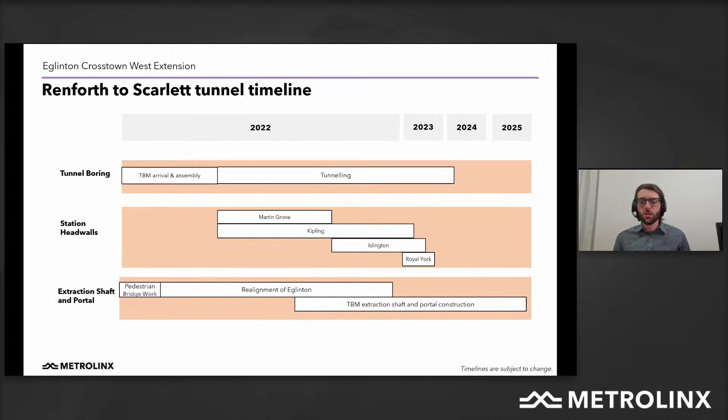Thank you very much, David, and good evening to everyone. In terms of the schedule of the Renforth to Scarlett Tunnel, I think we are really glad to share with the community that we are not only on time, but a few weeks ahead of schedule. The construction of the launch shaft is progressing well, basically finished.

The TBM arrived to site. We have already received the 2 TBMs, and we are progressing very well with assembly. The expected launch date of the TBM in spring 2022 is something we are confident we can maintain, and even gain some days on that.

There are no changes in terms of the station head walls. It is expected to start Martin Grove and Kipling head walls in April 2022, and we continue in the fall of 2022 with Islington, and in 2023 starting with the head walls of Royal York.

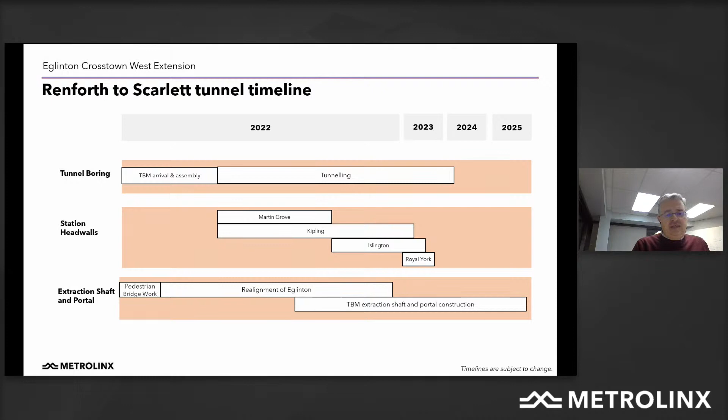The next thing we're going to open on this Renforth to Scarlett Tunnel site is the extraction shaft, which we will go through in the presentation with more detail, so I won't extend myself anymore on that.

In terms of the launch shaft update, I think we've brought some pictures of the progress, which are much better than an explanation. In this one you can see the progress of the launch shaft, which is almost finished.

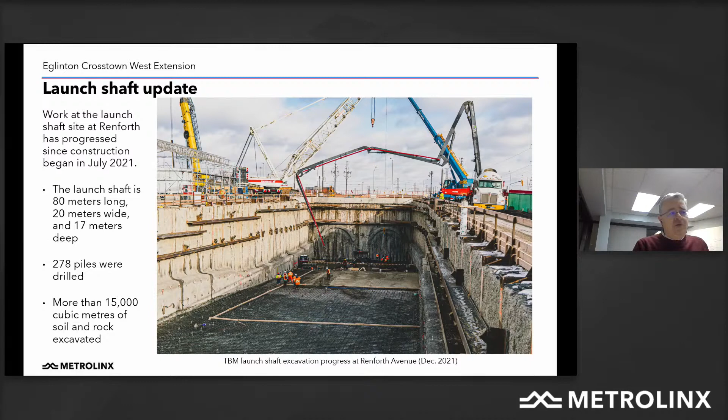This photo was taken in December and shows the start of pouring the concrete in the bottom slab. You can also see in the picture the big cranes we're using for the assembly of the TBM.

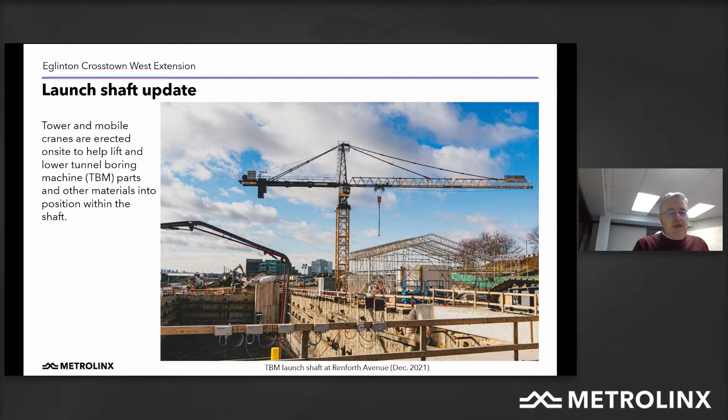As a big milestone in our project, on January 10th we lowered the first piece of the TBM into the bottom of the shaft. You can see in the picture that crane lowering the piece, and that the launch shaft is completely finished, with the bottom slab complete. This happened some weeks earlier than anticipated in our schedule, so we are really proud of the progress, even considering the winter conditions.

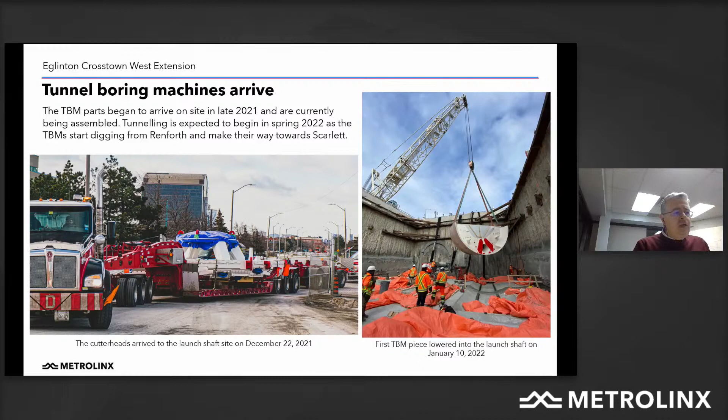The next site we are going to open is the TBM extraction shaft and portal. When the TBM finishes digging west of Scarlett Road, we will have to dismantle and remove it so we can continue construction of the portal. So we're going to use that shaft for two purposes: first, to extract the TBM that digs and constructs the tunnel from Renforth to Scarlett Road, and second, to permit the transition from underground to above ground.

The TBMs will operate up to 20 meters deep and will tunnel almost non-stop, with some scheduled maintenance days, until the tunnel is complete. Each TBM can tunnel 75 meters per week and will take approximately 20 months to complete the excavation and lining of the tunnel.

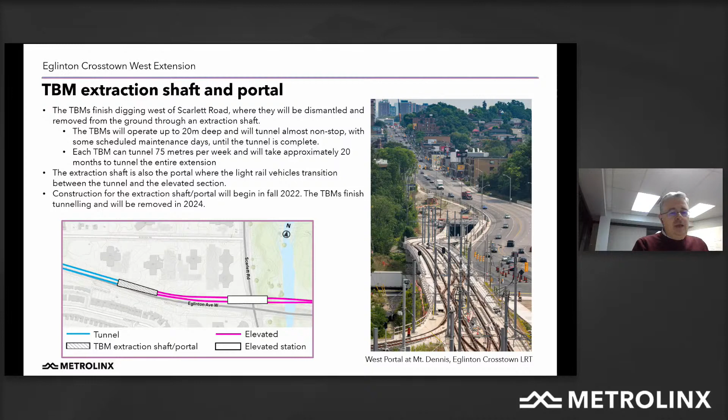Once we have constructed this ramp, we will divert traffic through the new ramp and demolish the existing one. It's important to note that during this phase the pedestrian bridge will remain open, not only through this stage but throughout the construction of the project.

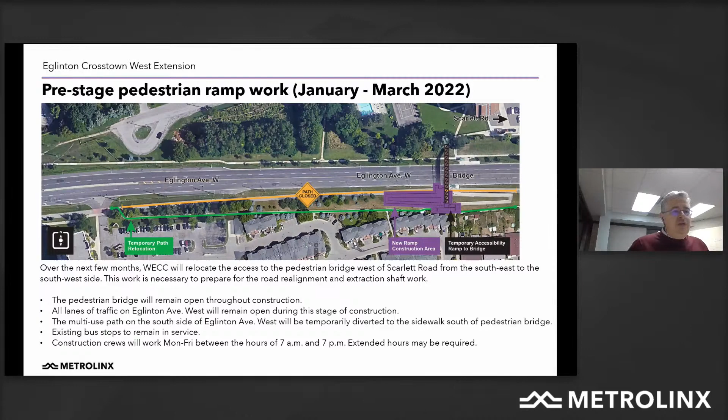In the next slide, we will explain the next stages regarding the proper realignment of Eglinton Avenue West, and for that we have our traffic manager, Hayat Mohammed, who will explain in detail the works of the realignment.

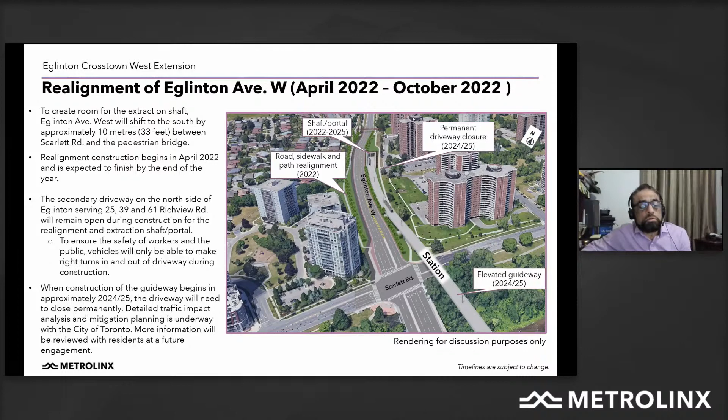We'll construct this whole realignment in two phases, and we'll finish this activity in approximately 7 months. The first stage will continue for 3 months, during which we'll reduce Eglinton down to a single lane in each direction.

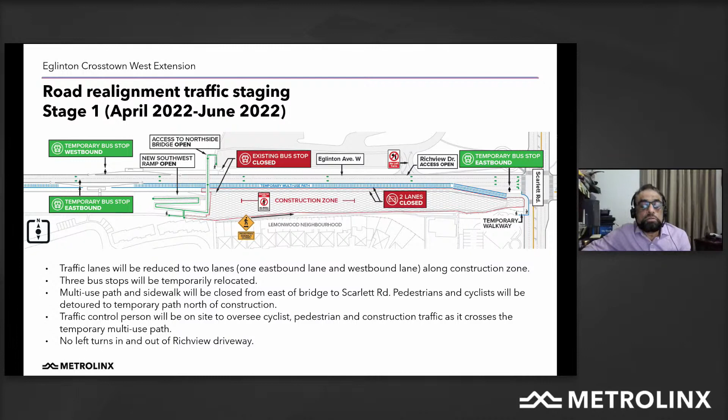Can you move on to the next slide, please?

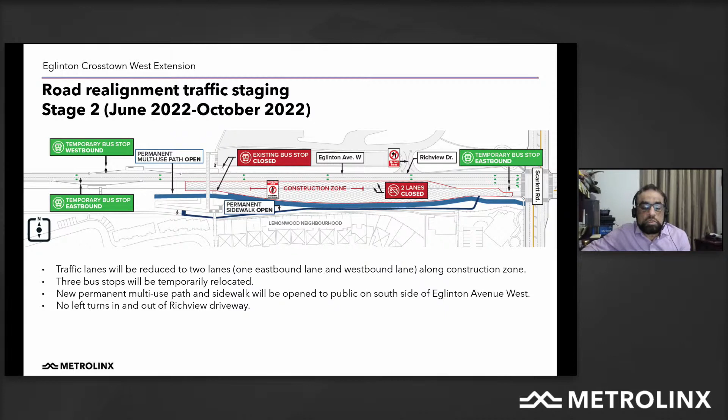This is the next phase, which is approximately 4 months. Everything remains the same, except that in this phase we will open the newly constructed multi-use path and sidewalk — that's the only change. Otherwise, Eglinton will still be reduced to a single lane in each direction, all TTC stops will remain relocated, and no left turn or left out will be allowed at the Richview driveway. Next slide, please.

So what to expect? This is really important because we are working very close to the residents, and dust, noise, and vibration are always associated with construction activities. Since we are so close, we are very sensitive to the dust and vibration.

For dust, all possible mitigation measures will be in place — we'll be using water sprayers, biodegradables, and dust suppressants. For noise and vibration, we'll be using monitors, which have already been installed on residences, offices, and commercial buildings in the vicinity of the extraction shaft, continuously recording noise and vibration levels.

That data will be very helpful for us to evaluate and make sure we are not exceeding the allowable limits set by City of Toronto bylaws. There may be further opportunities to install new monitors, and if anyone feels the noise level is exceeding limits or feels uncomfortable at any time, they can call our 24/7 hotline, and we'll respond and address the issue immediately.